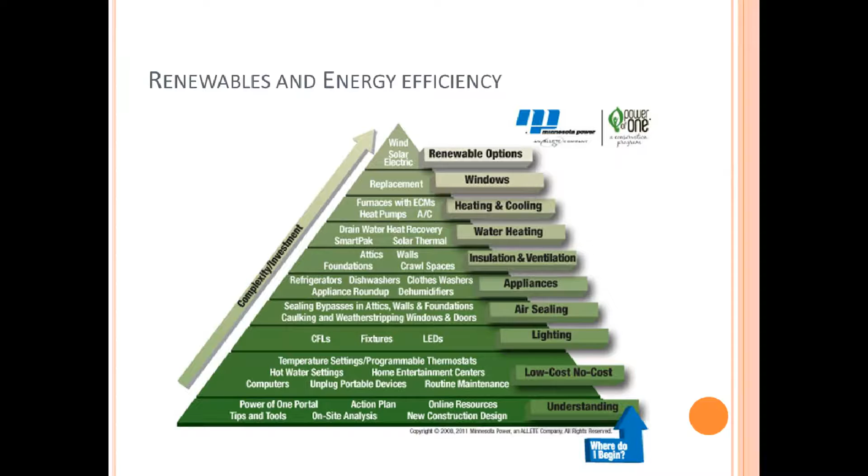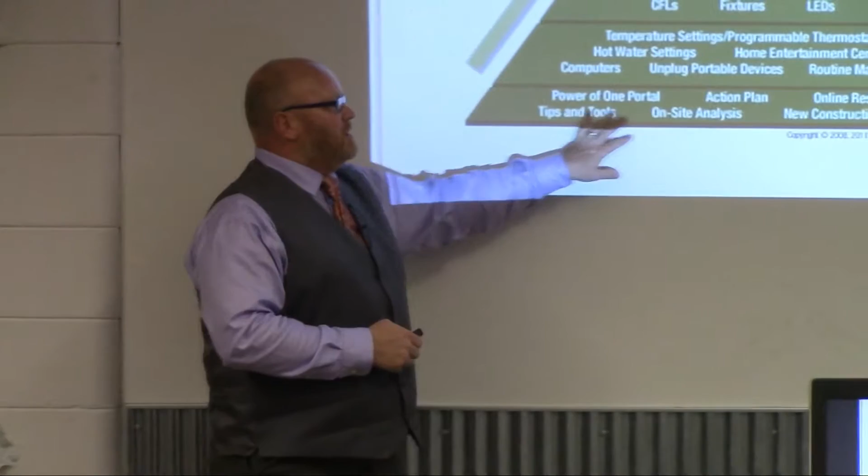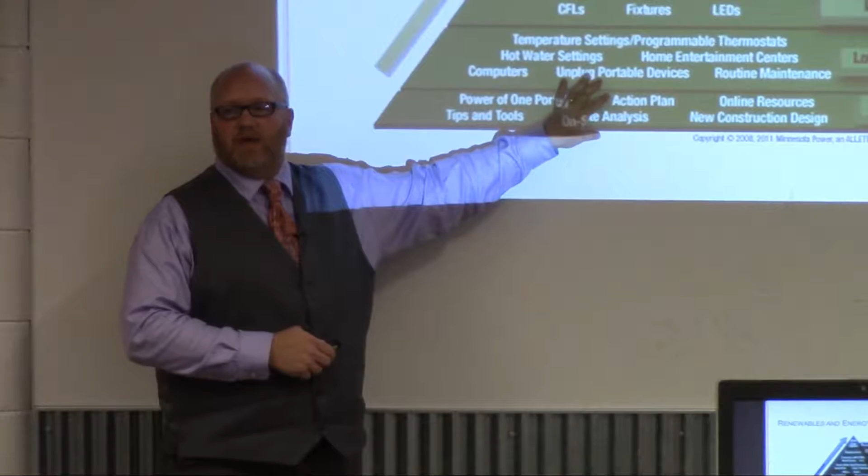One thing I need to take a quick step back, and this is one of my favorite slides. I took this from a presentation Jan Hubbard put together for MRES several years ago, but this really sums up what's going on. If you're familiar with the food pyramid many years ago, this is very similar to the energy pyramid. Starting out at the bottom, talking about understanding where and how our energy comes from, talking about conservation, low cost, no cost changes that we can make in our house, whether it's changing out a thermostat, whether it's doing insulation, whether it's unplugging portable devices.

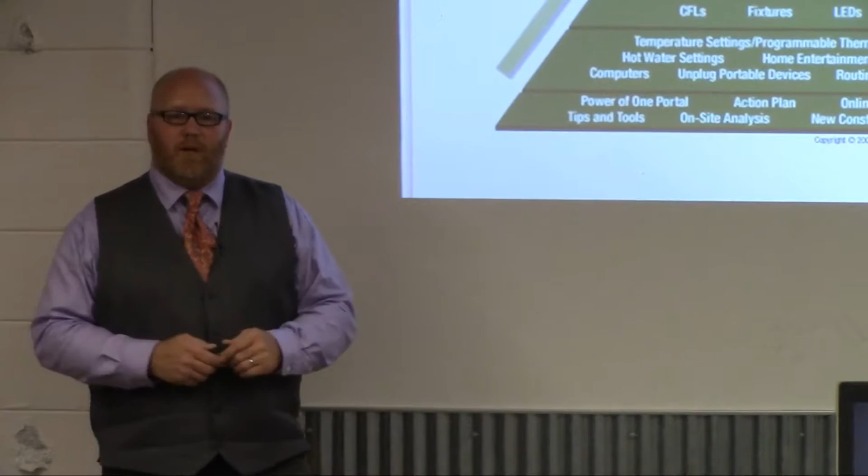All of these things, when you start to build them up, have a tremendous impact on both commercial and residential properties: lighting, CFLs, fixtures, LEDs, air sealing, appliances, insulation and ventilation, water heating and cooling, windows, renewable options. This sums up exactly what we do as a company and the science we install on individuals' properties.

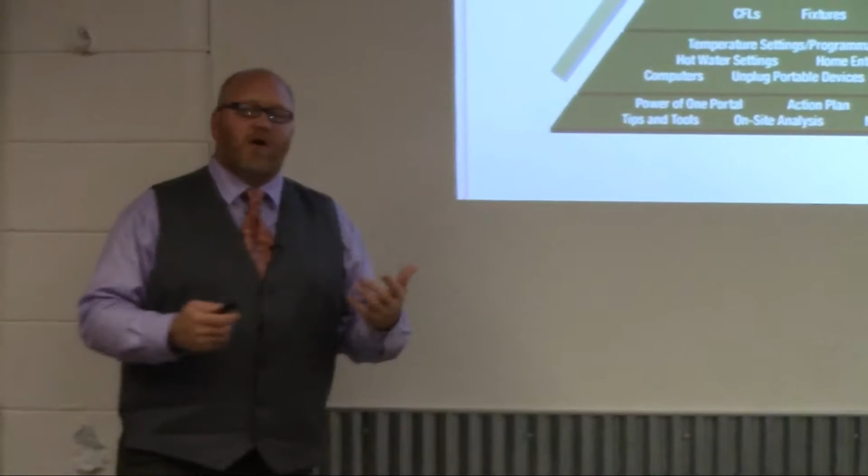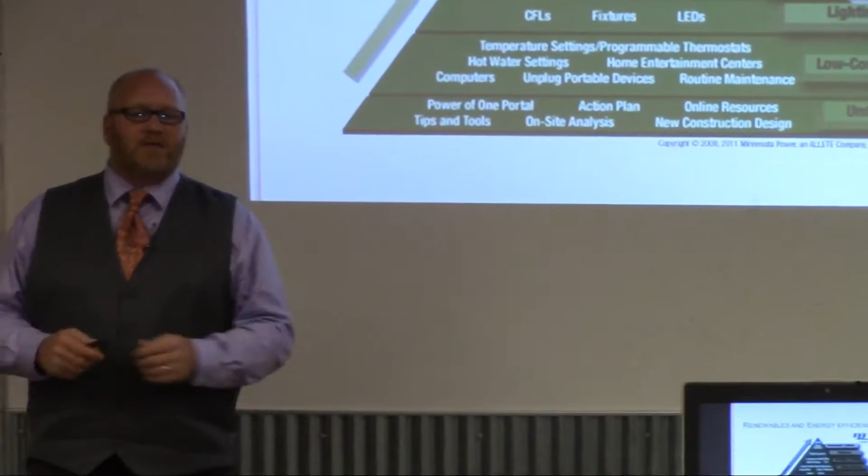I have to preface that with saying it's important, while new technologies are emerging, that we choose those technologies carefully. The number one thing we don't want to do with a property owner's property is play Frankenstein and experiment with products or services that don't work.

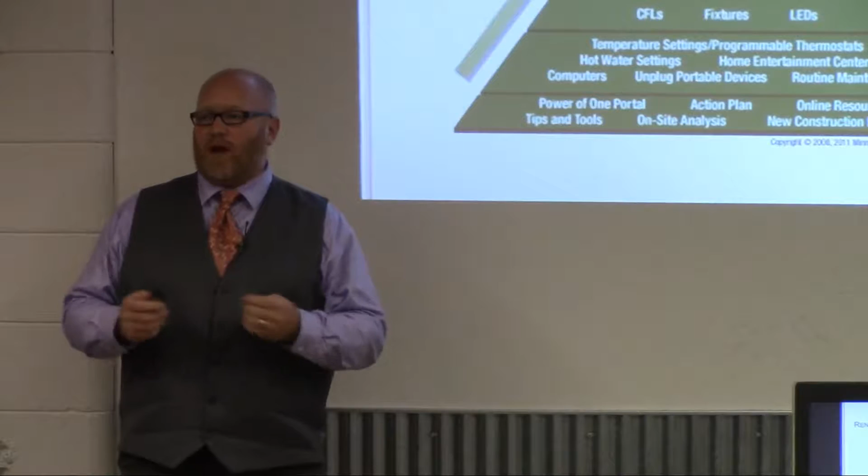I'm very fortunate in 18 years on the commercial side to have experience and see some of these technologies roll out and evolve. It's very important that we choose manufacturers that have been around, manufacturers that are going to stand behind their warranties and stand behind their products.

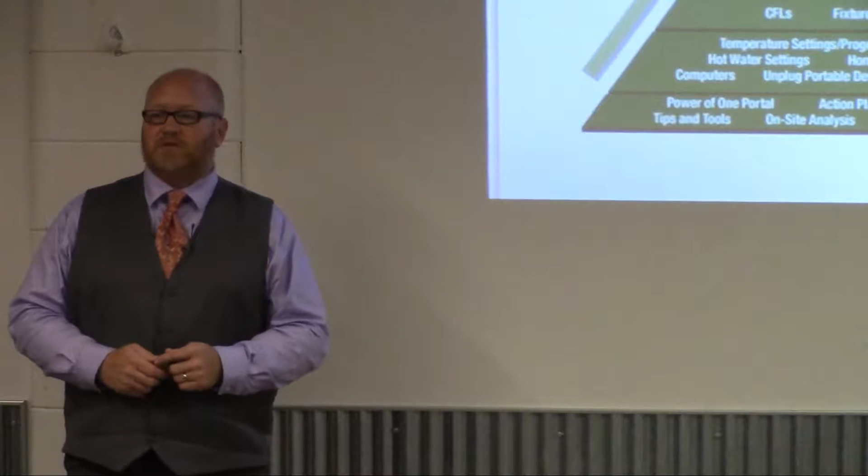I've also been a part of that process, even with some of the newer technologies we install. I've seen some of these companies actually go bankrupt and cause some pretty big problems in the supply chain, the consumer chain, and the warranty chain on some of these technologies. So that's something very critical, very important to think about when these technologies are installed in your house or your commercial business.

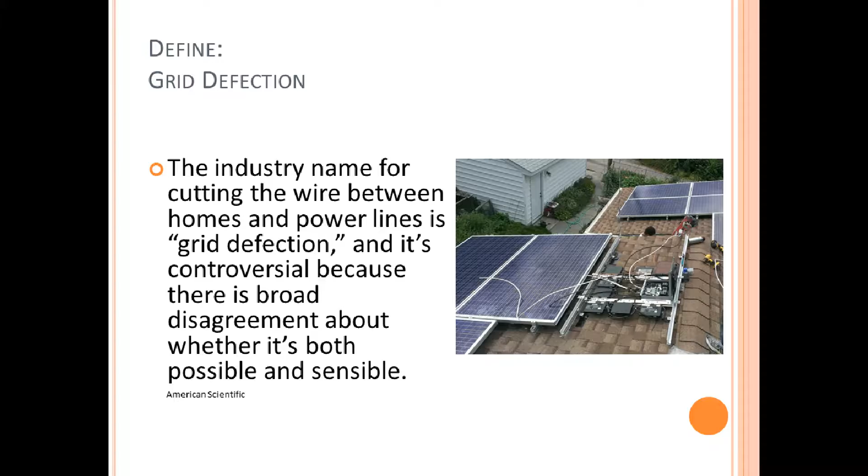So let's talk about what is grid defection. Define grid defection: according to American Scientific, the industry name for cutting the wire between homes and power lines is grid defection. And it's controversial because there's broad disagreement about whether it's both possible and sensible.

Many years ago, Al Gore got up and made some pretty strong statements, about 3-4 years ago, about individuals being able to cut that utility line. There's been a lot of challenges and obstacles for consumers who want their properties, especially with renewable energy, connected to the grid. A lot of barriers, a lot of challenges, mostly in policy and often in money.

Look at the Southwest, for example, Arizona utilities. I believe they currently have a $60 a month fee if you have solar to interconnect with their grid. You can Google any number of stories about the challenges we as Americans, in the land of the free, face installing energy systems with our own dollars on our homes and trying to get those interconnected with our utility companies.

I'm going to take this opportunity, since we're talking about utility companies, to put my MNCEA president hat on and make my statement about Xcel Energy.

We have the opportunity to upward manage Xcel to be the best utility company in North America. And how do we do that? We do that through good public policy.

So some of the things we're going to talk about tonight: technologies leading the way, grid parity, solar PV and thermal systems, solar hot water systems, electric and thermal hot water and heat pumps and ground source heat pumps, battery storage, the Tesla battery, ECM DC motors and variable frequency drive, LED lighting retrofits, passive house, and LEED platinum buildings.

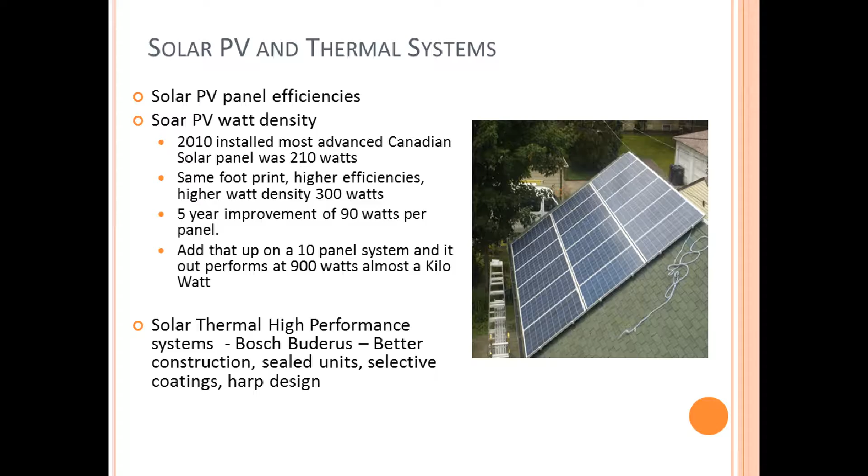Let's talk about solar thermal, high-performance systems. More high-performance systems are coming out in the solar thermal, specifically hydronic, hot water heating. Systems such as the Bosch Buderus, better construction, sealed units, selective coatings, HARP design of their hot water, the copper piping inside of it. I know this system in particular, not the picture here, but Dave and Nancy Moe have a Bosch Buderus system on their roof.

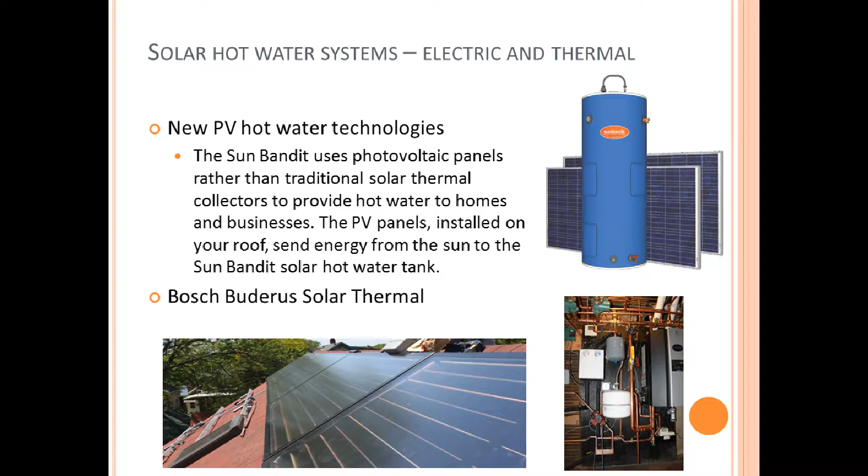The new technologies for solar hot water systems, electric and thermal. Who's here has heard of the Sun Bandit system? Sun Bandit is pushing technologies, creating hot water by using a very specific, proprietary inverter and using resistance electric heat to heat hot water with approximately 3 solar panels. What's unique about this is it's not a grid-tied system. So this system's going to heat water. Now it does have an electric backup to the grid.

So let's say you have extended days, maybe you've got 2-3 days of overcast, or maybe it's in the winter where you don't have sun. You have the opportunity with technologies now where people can actually have a standalone system heating water, whether it's solar thermal or solar PV, where they don't have to necessarily be dependent on having electricity from the grid heating their hot water. Now, as many of you probably know, the second biggest energy consumer in a house is heating hot water. The first biggest consumer in your house is the energy used to condition your air, whether it's heating or cooling. And we're going to talk about some of those technologies coming up too.

The Bosch Buderus solar thermal system. Here's a quick example. This is a 4-panel system that was installed in Powderhorn neighborhood. This system has a backup HTP 96% efficient boiler. Here's what's exciting about this particular install. This was a duplex. And in this duplex, he had 2 gravity boilers. Now imagine the efficiency on gravity boilers.

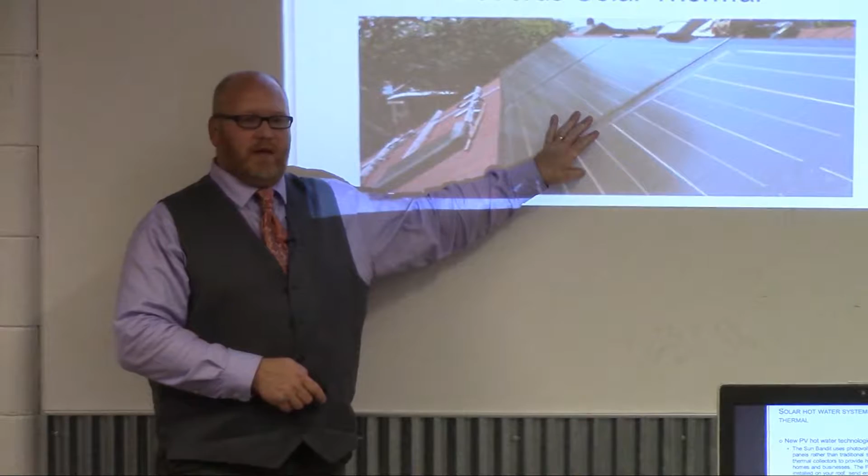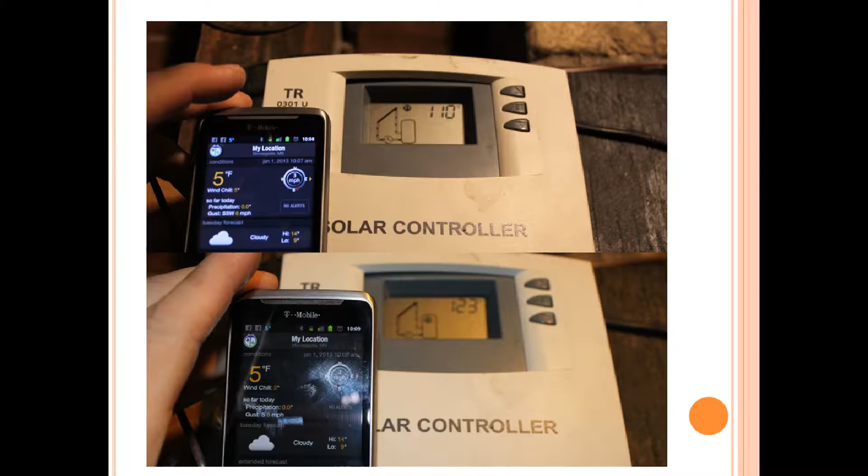Now, the next question is, how efficient are these systems really making hot water in the winter, right? So, I'll give you an example. This is January 1st. I don't know if you can see it right here, but the date is January 1st, 2013, and it is 10 o'clock in the morning. Don't ask me why I'm at my customer's house on New Year's Day, but I thought this was pretty cool because it was cold out. Went over and took a look. It is 5 degrees out at 10 o'clock in the morning. The sun is just coming up.

This little dot right here is the thermistor in the thermistor well on his hot water panel system. It is producing hot water at 110 degrees at 10 o'clock in the morning, and it's 5 degrees outside. This is my phone I'm holding here. That's over 100 degree temperature rise at 10 o'clock in the morning. That's pretty amazing, pretty impressive.

The picture down here is exactly 1 minute later. I've now moved the sensor. You can see the sensor reflects the panel up here on the roof. I've now moved the sensor to the top of the tank. Because of stratification, hot water collects at the top of that tank, and that's where we want to draw that hot water from. At 10 o'clock in the morning on January 1st, at 5 degrees outside, he has 123 degree hot water ready to go out of his tap.

So again, looking at these technologies, looking at what impacts these have in terms of our local utility companies, what are these consumers doing withdrawing their energy reliance from their utility, their relationship.

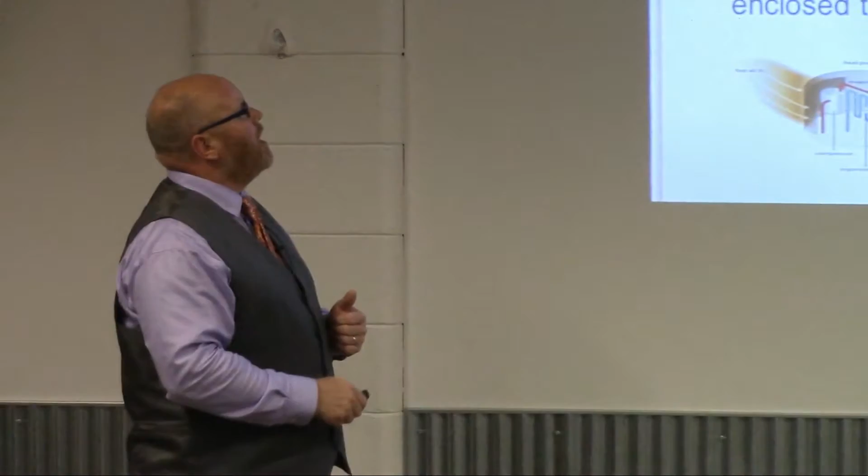Hot water and heat pumps. Love this technology, there's a great story behind this. So is anyone familiar with hot water heat pumps? House heat pumps? Yep, we're going to talk about that too.

So we had a client in Longfellow neighborhood. We installed, I think it was a 7 kW size solar system on their garage. Bruce and Aggie, and they had an old water heater that was going out. About 2 years after we installed the solar system, they came to us and said, hey, we really want to get rid of this water heater, but we really don't want to be reliant on natural gas.

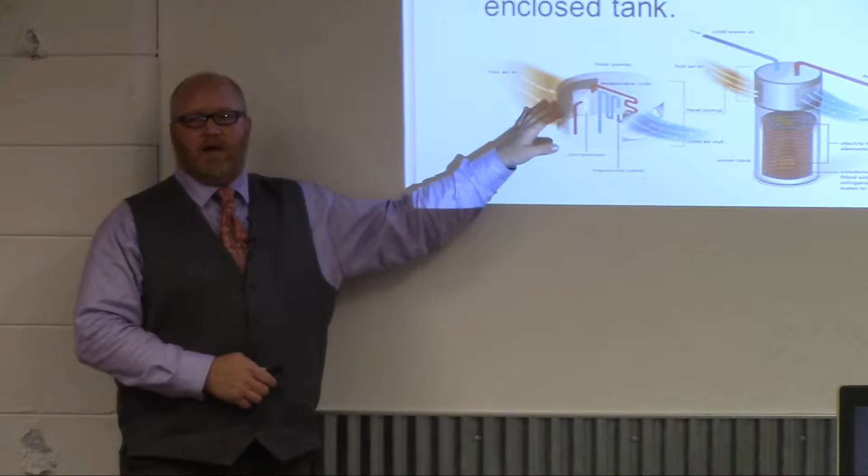And so Bruce brought a technology to me that was actually new to me about hot water heat pumps. It took him about a month of conversations every 3 days, and I kept telling Bruce, this is ridiculous. Why do we want to spend electricity that you're generating to heat hot water? It doesn't make sense, I don't get it. Electric resistance heat, while it's very efficient, isn't very efficient when you're using your solar PV system.

But he said, Dustin, look at the math, do the numbers. The system we installed cost their household, 3 people in the household, less than $100 a year to heat their hot water. And actually, they're doing it for free because they're getting it from their solar PV system. That was a learned lesson for me, but I had to go through, do the math, look at the numbers, look at the energy efficiency, and understand how this technology worked.

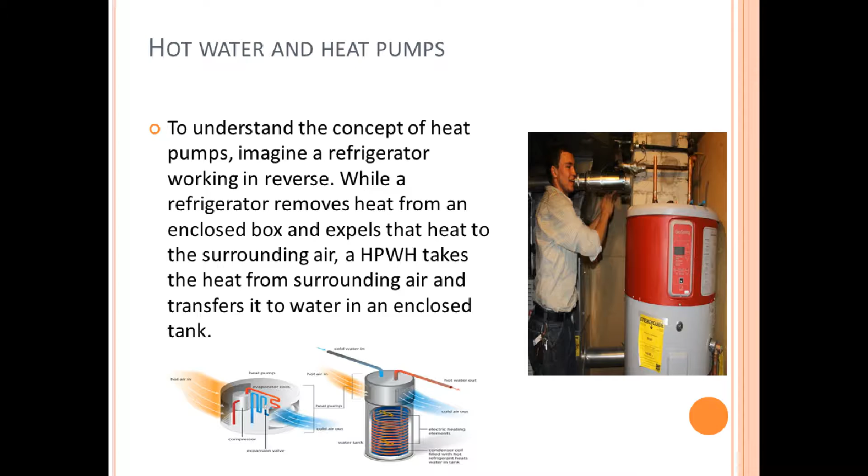On the right here, we've got a system. This is the GE GeoSpring. Installed that 3 years ago. This is their 2nd or 3rd generation. I believe they now are on their 6th generation heat pump water heater.

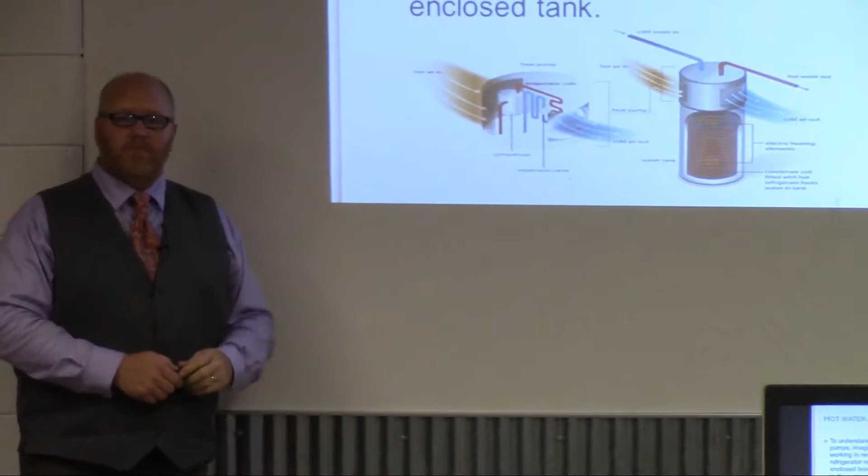How does a heat pump water heater work? Well, real quickly, what we're doing is taking indoor ambient air temperature from a room. We're putting that into a process of compression and refrigeration, and we're then heating that water with the ambient air. What's coming out is cool, cold air.

And what did Bruce really like about this? He had a damp, wet basement. He now has a dehumidifier in his basement because he has an open, large enough space where this heat pump water heater is taking that air and conditioning it.

Now, a lot of people are saying, okay, well, heat pump water heaters, I've done the research, they just don't work in cold climates, right? Wrong. Products out there now, such as AirTap, is the only heat pump water heater brand that meets stringent cold climate performance ratings such as those defined by the Northwest Energy Efficiency Alliance Tier 2 Standards program. AirGenerate, the name of their product, has finished first in the hot water segment of Department of Energy's biannual solar decathlon competition 3 times in a row.

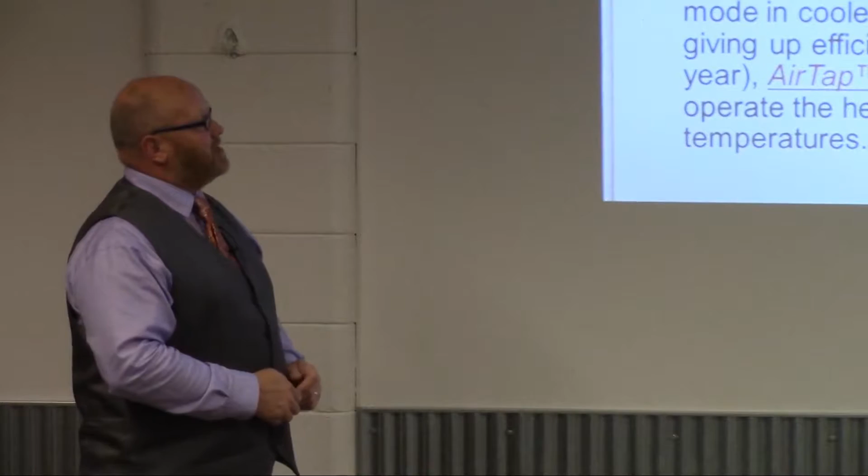Whereas most heat pump water heaters switch to electric resistance mode in cooler ambient temperatures, thereby giving up efficiency for several months in the year, such as the winter.

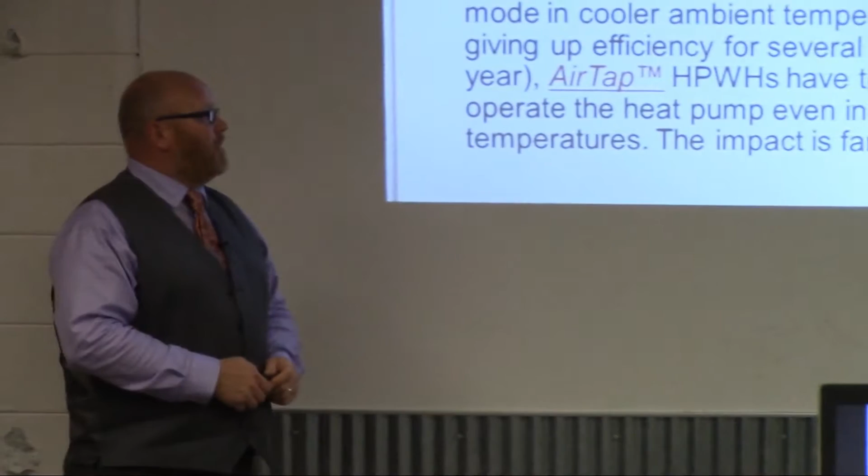AirTap heat pump water heaters have the capability to operate the heat pump even in sub-freezing temperatures. The impact is far-reaching. What they've actually been able to do with their technology is take a heat pump water heater, and they've got a duct system on here now.

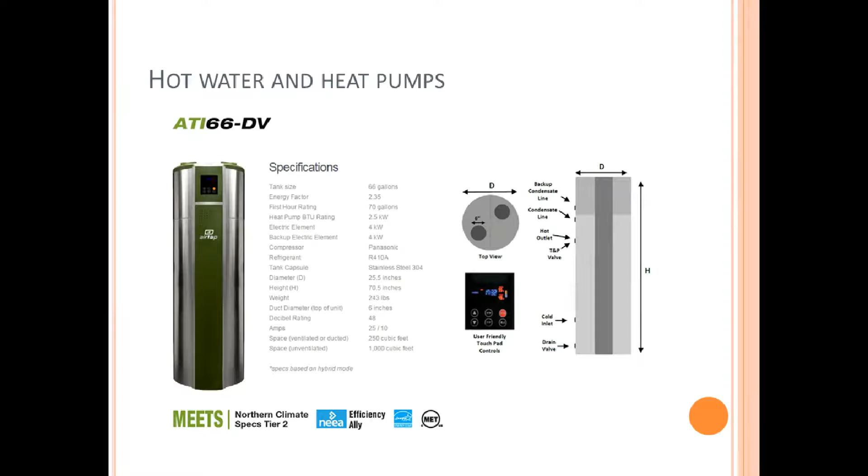We can actually decide where we want to get the hot air from. Maybe we don't want to pull it from the basement. Maybe there's a warmer place in the house, up near a ceiling, where we can continue to pull that hot air. And maybe there's also an opportunity, as it discharges that cooler, drier air, to use that in the property. We can discharge that air now. It's got a 6-inch duct on it. We can put that into different parts of the house. Pretty cool technology.

Ground source heat pumps, I'm not going to cover too much on that because I think a lot of people are familiar with the technology behind it.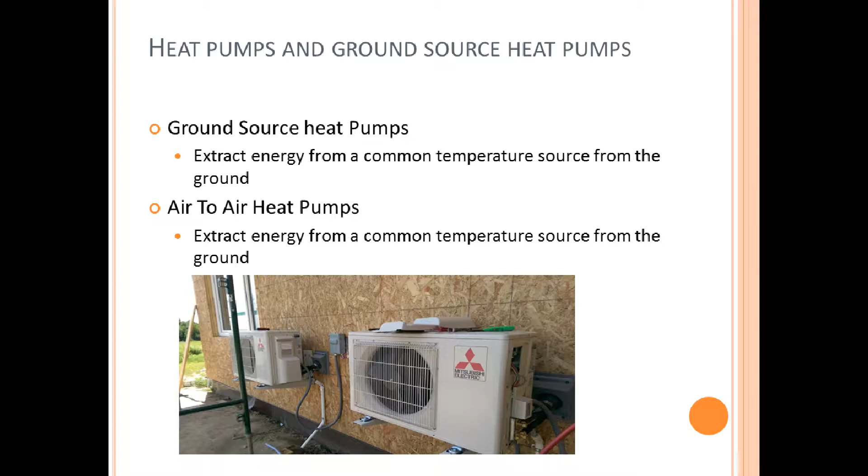Air-to-air heat pumps. Who's familiar with air-to-air heat pumps? Very good. So air-to-air heat pumps have made incredible strides in the last couple of years. Coming from a mechanical background, we installed air-to-air heat pumps commercially, a lot in communication and telecom facilities. We used those when we went into Bloomington School District when they started converting their custodial closets to telecommunications with their servers. They needed to get that heat out of there. So air-to-air heat pumps used to primarily do air conditioning, but now the industry has made this heat pump do both heating and cooling.

These 2 Mitsubishi units, can I see a show of hands? Who went out to the solar tour last weekend? Very good. Whose property was on the solar tour? Awesome, very good. So this is the Peacefield Farms Passive House. If anyone made the long drive up to Stanchfield, Minnesota, amazing products and technology used in this house.

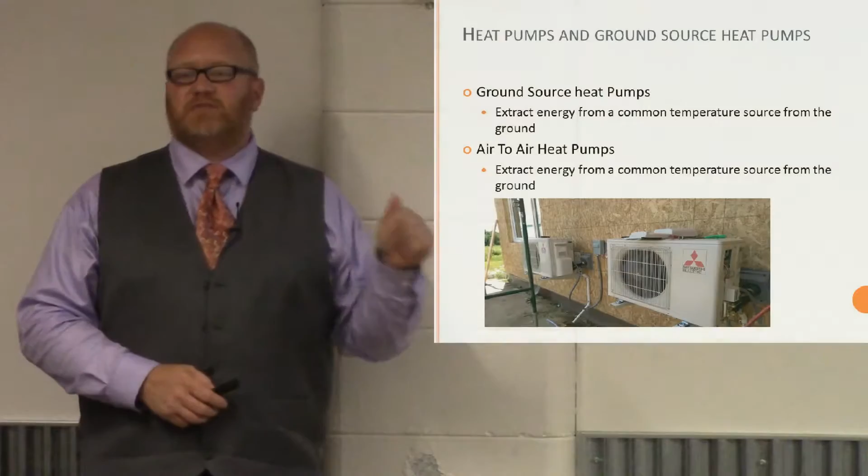So these are 2 Mitsubishi one-ton heat pumps and air conditioners, and these are going to heat the house down to -17 degrees. That's pretty amazing, to extract energy at -17 degrees to create heat. And they're doing it very, very efficiently.

How efficient? These 2 units here were rated at 33 SEER. SEER is an acronym for Seasonal Energy Efficiency Ratio, and it's a way of rating the efficiency of HVAC mechanical equipment. So these have a 33 SEER energy rating.

These units were pretty cool because if you're familiar with heat pumps, they have an outdoor unit—think of this as your ductless heating and air conditioner. These units have indoor head units, and they've gotten the technology now to the point where we've got head units mounted in two portions of the house: one in a bedroom, one in a very large second floor loft.

They now have little rotating eyes at the bottom that sense individuals or people in the room, and if people walk away, it'll go into a default mode and drop itself. Let's say if you're in heating mode, it'll drop itself about 5 to 7 degrees. Or if you're in cooling mode and it doesn't need to keep constantly cooling, it'll raise the temperature so it doesn't have to work so hard.

Now, what's unique about these technologies is a DC variable speed inverter compressor. I'm going to say it again: DC variable speed inverter compressor. What does that mean? Well, it means that what we all grew up with many years ago, our air conditioning or heating system, was a single-stage on-off device.

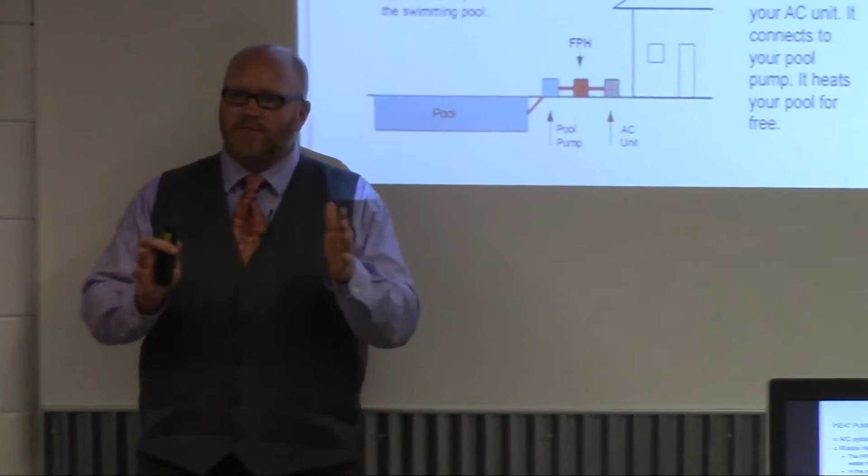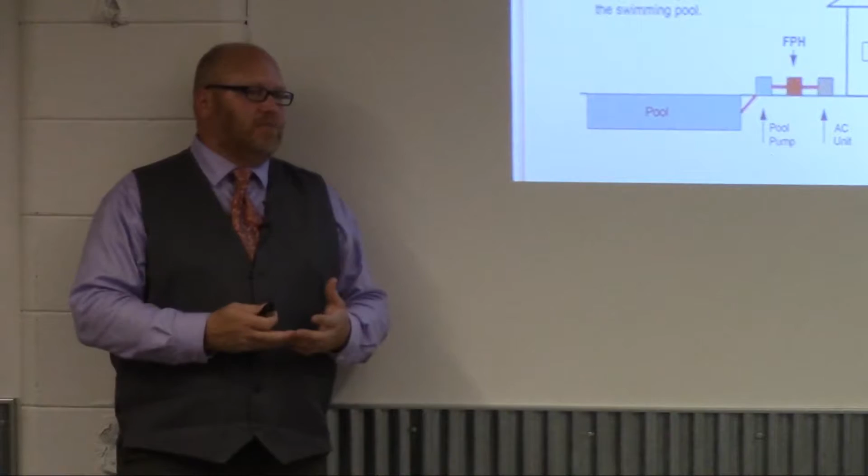So let's think about this, talking about air conditioning systems. How many of you have walked out to your air conditioner, put your hand over the AC unit, and it's spitting out all that heat in the summer? One of the things I learned many years ago in my apprenticeship program, they always taught us that the AC system inside the house is a heat picker-upper, and that unit outside is a heat giver-awayer. We're not actually inserting cool energy into the house, we're removing the presence of heat in the airstream at the evaporator, and we're rejecting that heat outside.

So that brings about a whole new set of technologies, what's called waste heat. Commercial properties and residential properties have a tremendous amount of waste heat. Depending on the industry or business sector you're in, if you're in retail or the food industry, your freezers and refrigeration cases are taking a ton of energy and rejecting that heat.

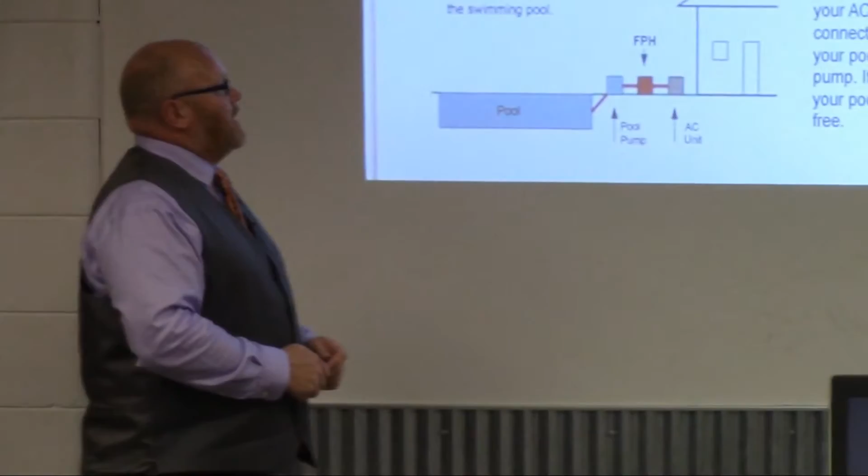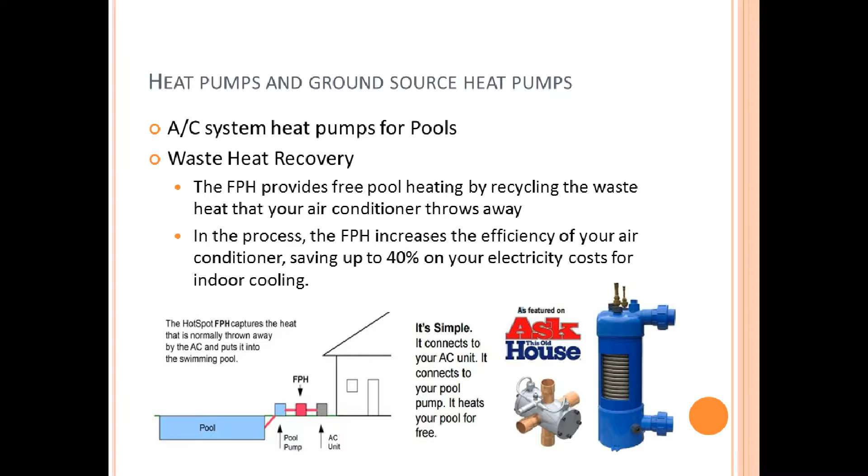Here's another example, an AC system heat pump for pools: waste heat recovery provides free pool heating by recycling the waste heat that your air conditioner throws out. Here's an example where, as a refrigeration mechanical contractor, we tie into the refrigeration lines of your property. In the summer, you're taking refrigerant, 410 or R22, through the process of condensing, taking that energy from inside the house, that heat, and throwing it outside. What we do is intersect those refrigeration lines and put them through a process that takes that heat and allows us to put it into the pool.

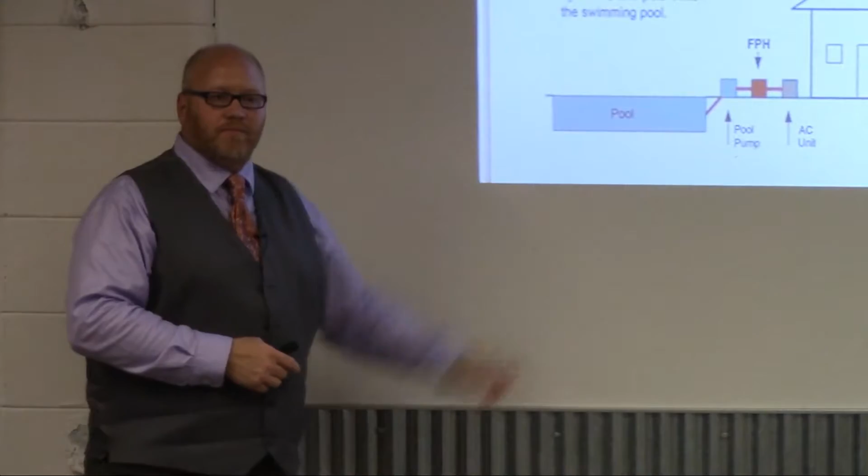The FPH increases the efficiency of your air conditioner, saving up to 40% on your electricity costs for indoor cooling. That's because your compressor and condenser are working less.

Question: can you put that in your water heater instead? Yes, there are technologies you can put this in your water heater too.

Extend your swimming season to match your air conditioning season with zero pool heating cost. The FPH converts your standard AC into a water source geothermal type system, saving up to 40% on air conditioning costs. An automatic programmable thermostat controller monitors the pool temperature and activates the pool pump heat recovery when heat is needed to maintain the desired pool temperature.

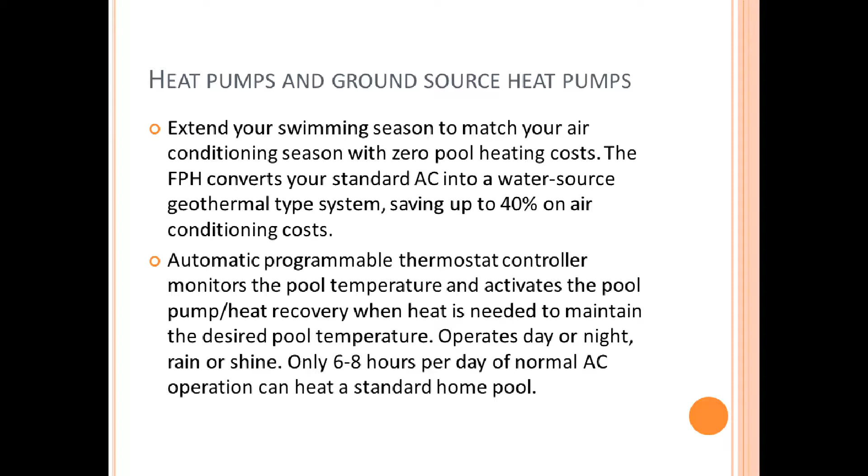It operates day or night, rain or shine - only 6 to 8 hours per day of normal AC operation can heat a standard home pool. I'll challenge that a little in our northern climate, but definitely in the southern United States, where they're running air conditioners almost constantly in summer, you can get by heating your pool with a system like this.

You think the utility company likes that?

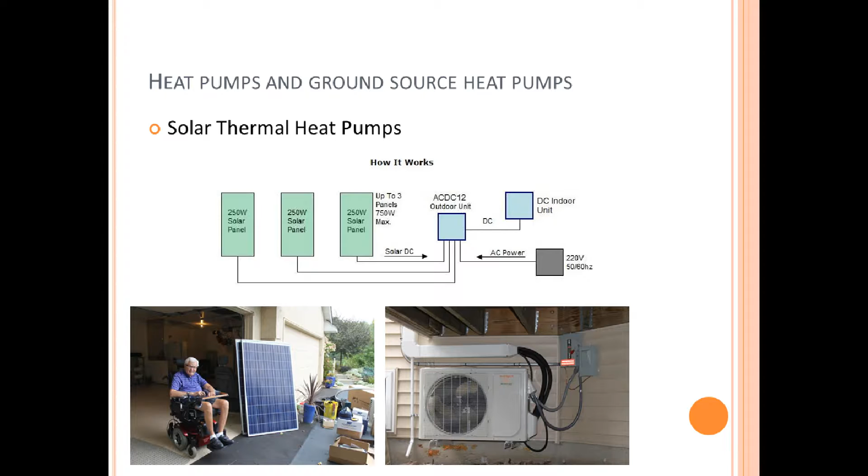Heat pumps, ground source heat pumps - so on the topic of heat pumps, let's take it to the next level and make it a solar-powered heat pump. Think about that concept: I've got all this sun in Minnesota, and I can power my air conditioning and heating system up to 90% when the sun is shining. So I'm literally spending pennies a day to do my heating and cooling.

The technologies out there are up to 1 ton, so this will handle anywhere from about 700 to maybe 900 square feet. Think of it as your zone heating.

This particular install we did in Lakeville - Harley here had a very large open living room shared with his kitchen, and he also had a nice big ceiling fan in the middle of that living room. So we had a great space to install the head unit, and a great space for the outdoor unit right below it. Now every time the sun is out, Harley is running his system 90% off of the sun.

What's unique here, that the utility company probably does or doesn't know, is that this isn't necessarily an energy producing grid-tied system. He's got 3 solar panels giving us DC, direct current. Why does our heat pump like DC? Because it's a DC inverter variable speed scroll compressor - it loves DC power, taking it straight from the panels and sucking it up all day long, feeding our outdoor unit.

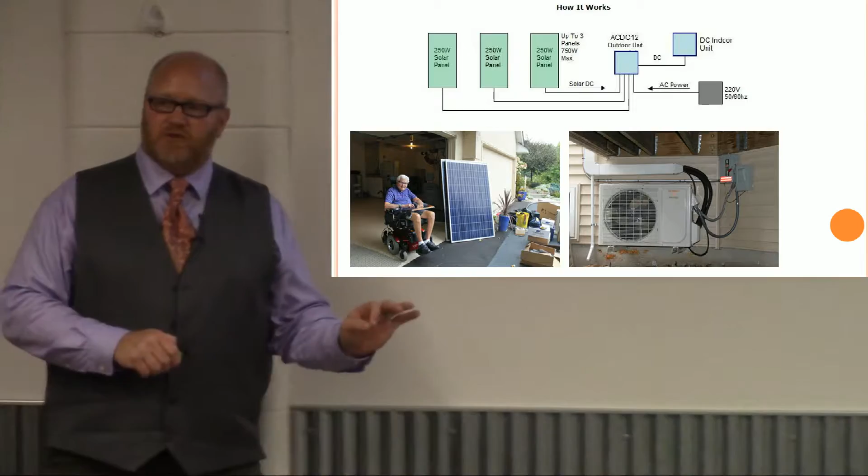We have our indoor unit, our head unit, and whenever we need backup AC voltage, it draws it right from our electrical panel. Outside here we have a DC disconnect from our solar system, and a backup AC source for cloudy days - or say it's a hot, humid night and he wants to run his system but doesn't want to run the whole house air conditioner. Here's a solution. Think the utility company likes that?

Pennies a day doing his heating and cooling.

Let's look at another example: solar thermal heat pumps for home or office use. The system will cool an area for pennies with 90% or more of the energy coming from sunlight. In addition to cooling, this particular model, the ACDC12b solar heat pump, will provide solar powered heating operating all the way down to an outside ambient temperature of 5 degrees.

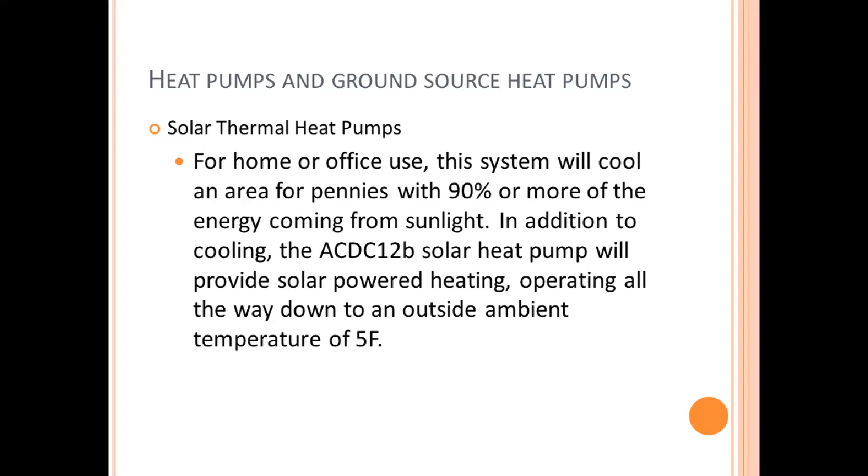Let's talk about batteries and storage. There's a lot I could talk about, but the Tesla Powerwall that's coming out, I believe, is really going to be a big game changer - because they took something that was so complicated at some point and made it so easy.

The Powerwall comes in a 10 kilowatt hour weekly cycle and a 7 kilowatt hour daily cycle model. Both are guaranteed for 10 years and are sufficient to power most homes during peak evening hours. Multiple batteries may be installed together for homes with greater energy need, up to 90 kilowatt hour total for the 10 kilowatt hour battery, and 63 kilowatt hour total for the 7 kilowatt hour battery. You think the utility company likes these?

All right, let's move on to ECM DC variable motors and variable frequency drive motors. In the commercial world, I was very fortunate and privileged to watch the evolution of what we call variable frequency drive. Think of it basically as a large commercial motor that instead of having a fixed speed, running at whatever RPM on and off, we can now match that fan motor RPM with the desired load required for heating and cooling.

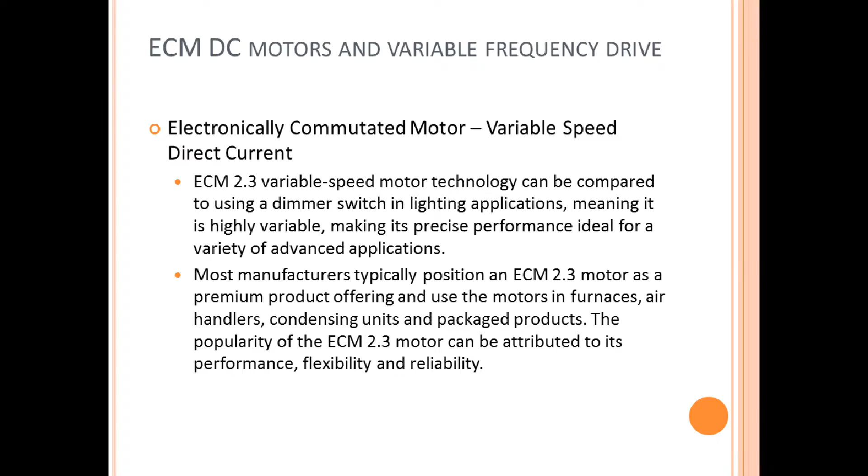Typically another commercial application, when we installed the first variable frequency drives with large commercial HVAC equipment, these units came into us and they were almost like the size of 4 or 5 lockers from floor to ceiling, with the amount of electrical components and circuitry required to run these variable frequency drives.

I now see systems that are running what I call fart fans, basically exhaust fans in bathrooms in commercial applications. I now see variable frequency drives running rooftop fans that are about as big as an electrical box. It's amazing that they've taken technology that used to be storage lockers in size, running very, very large electric horsepower motors, down to just being able to run much smaller applications.

For example, in the church here, you might have a common bathroom, maybe 5 or 6 stalls, a couple of urinals, and maybe back in the day the fan ran all the time. Well, now what we can do is tie the fan to the automated lighting switch. It doesn't need to run all the time. We can have it run when someone walks in, and run 5-10 minutes after they leave, just to clear the air circulation in that room.

Based on load, we can start to size that fan depending on the size of the bathroom, or for example a stadium restroom that might have anywhere from 5 people to 50 people using it at a time. We can now take that motor on a variable frequency drive and really ramp it up and down based on load in that exhaust cycle.

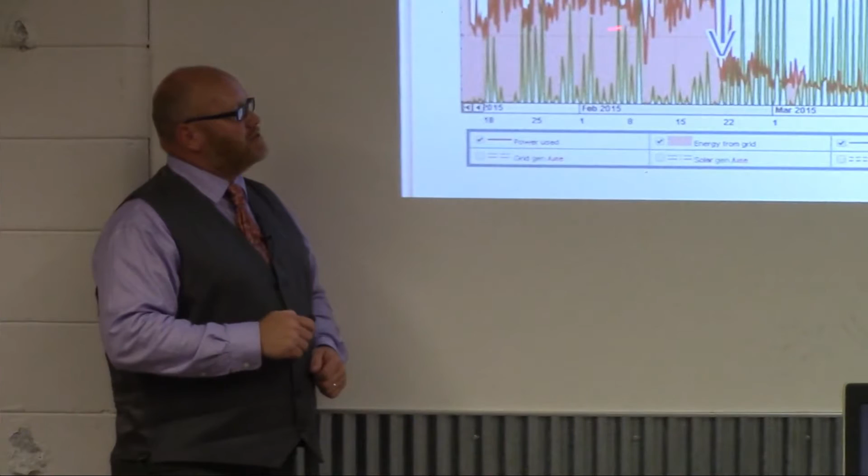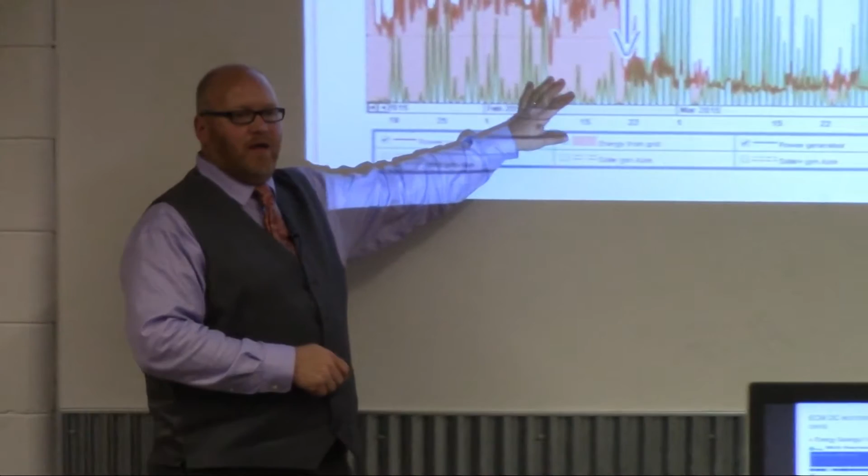Now look at the difference here. From that day, this shows almost 1,000 watts, a kilowatt, in energy savings just from moving to this fan. And bear in mind, this is just the electricity. The gas alone, going from an 80% to a 96% modulating gas valve, was an amazing step in energy efficiency for this property.

So, another example of how efficient these systems are—how about 80% or greater when we talk about just the fan speed technologies? You think the utility company likes this?

LEDs. How many people have installed any LEDs in their property? Good for you. Isn't it fun to watch the cost of these products start to drop? Probably not so when you first bought them a year ago, but it's amazing, these technologies, what's driving these changes.

So I don't need to tell you too much about LEDs. Light emitting diode is one of today's most energy efficient and rapidly developing lighting technologies. Quality LED light bulbs last longer, are more durable, and offer comparable or better light quality than other types of lighting.

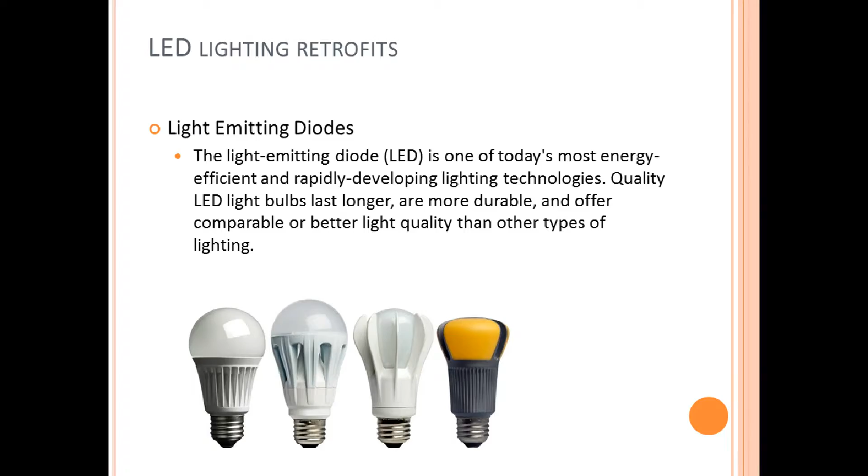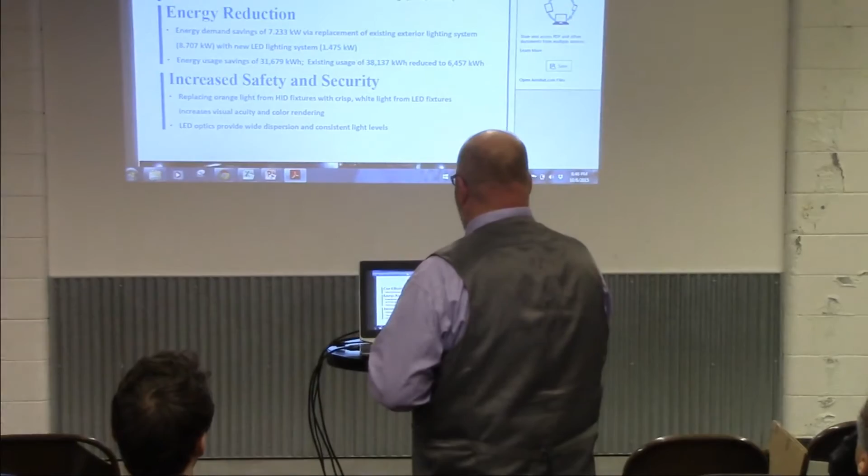Let's take a look real quick for an example and see what the difference is. We did a commercial LED lighting retrofit, and we happened to do a case study on it. So what we have here, I believe this was a seven building condominium complex in South Minneapolis. And this building, we just went after the exterior lighting.

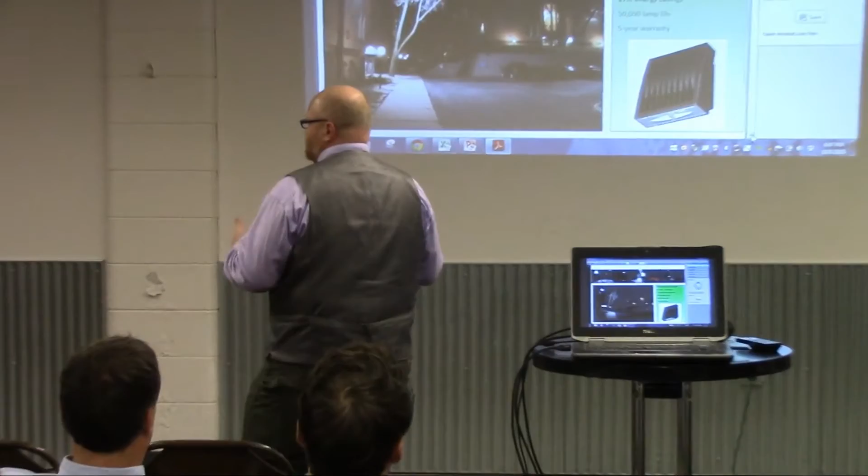Now, while we thought the numbers were impressive, the most interesting comment people made about this retrofit was, hey, we can now see things in our parking lot. We can see the difference between a maroon car and a black car, because before they had high pressure sodiums, HPSs, and they couldn't tell. They called it the old mood lighting. Before their energy retrofit, they'd have a conversation at night next to these lights and could barely tell the colors people were wearing, or the colors of cars in the parking lot. So they were very excited about the bright white light they were now getting.

An example of some of these replacements: we were going from 150 watt HIDs to 20 watt fixtures. That is a huge savings. Huge.

So that pretty much is the end of my presentation. There's 10 minutes left for you guys to ask some questions. Think about these technologies, where the future is headed, how they're being used. A lot of people ask me, well, yes, there's a cost for these technologies. How can we afford these?

Well, I think it's about commitment. I think it's about thinking about the next generation. It's a commitment more than just dollars. And when we look at the analytics, the energy savings come out in the long run, whether it's a 5-year payback or a 10-year payback. The facts are there. The numbers, the proof, the evidence, the numbers are there. That's what our company does, is we put that information out there. So, questions?